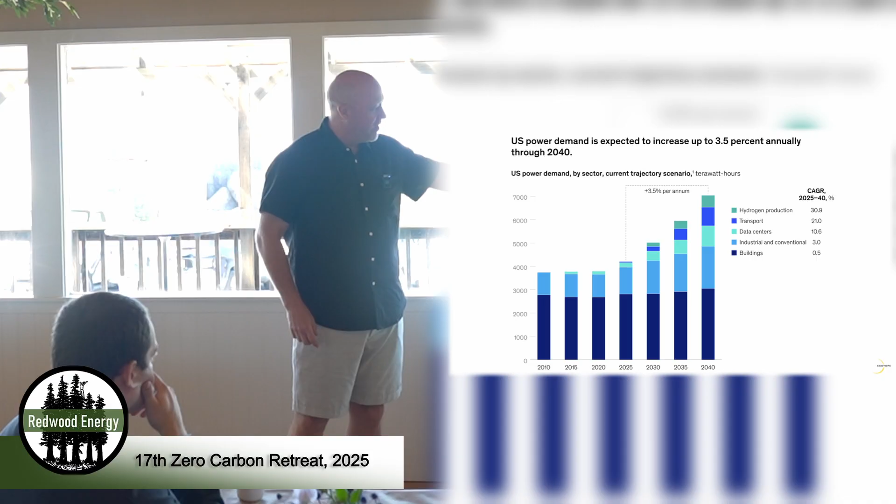So carry on, okay, I'm going to go kind of fast. So the energy demand growth—this was a McKinsey report, basically showing steady growth from now till 2040. The areas we're seeing growth in are hydrogen production, transport, data centers, industrial, and conventional. That's all big picture data projection, but there's essentially a lot of growth happening now, about 3.5% per year from now till 2040.

The same thing is happening next—oh sorry, I think that's just electrification. Okay, so a lot of the electrification for industrial and buildings, that's sort of the impact there. I don't know a lot about that, I just kind of pulled it up.

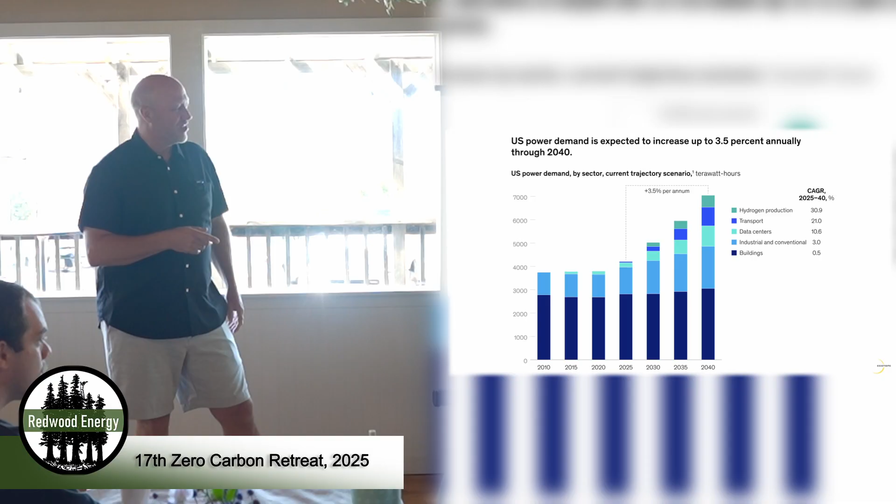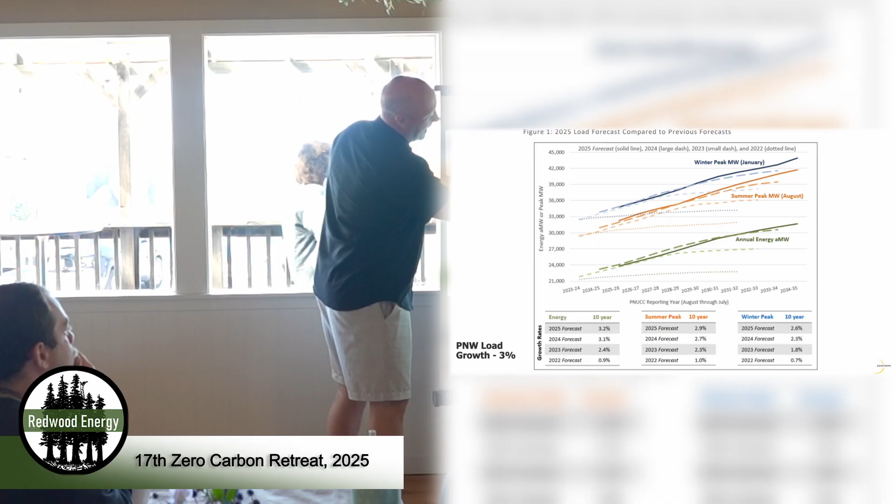But next slide, just reiterating, this is the Pacific Northwest grid—that's Washington, Oregon, Montana, Idaho. We are a winter peaking utility, closely becoming a summer peaking utility. There's our annual average megawatt hour, but the gist is the grid's about 50% occupied, and because of peaking we need another 50% to handle that one day. So that's the real crux of the problem: we've got a grid that's this big, and capacity at this big, but every once in a while we get these spikes. Those spikes are valuable energy.

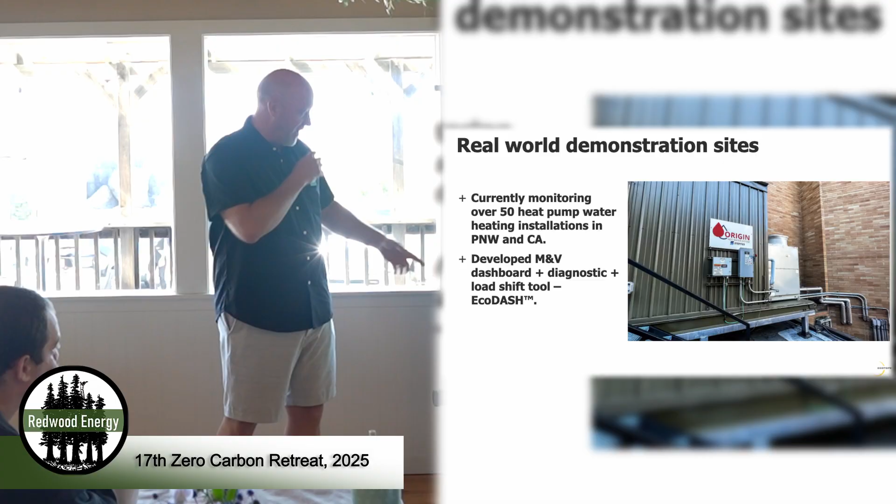I want to show you two projects we've done on this to paint the picture. Right now we've got about 50 heat pump water heating sites that we're monitoring, this is 1 minute data, super valuable stuff. We developed a new tool called EcoDASH - it can do M&V on hot water systems. It's a dashboard, a diagnostic tool, and it can also automate load shift, and we've done a lot of automation on that to try to work around things.

What are the size of the heat pumps in this? In this one, this is a Mitsubishi 10-ton or 11-ton heat pump, I'll show - they're kind of bigger, central units.

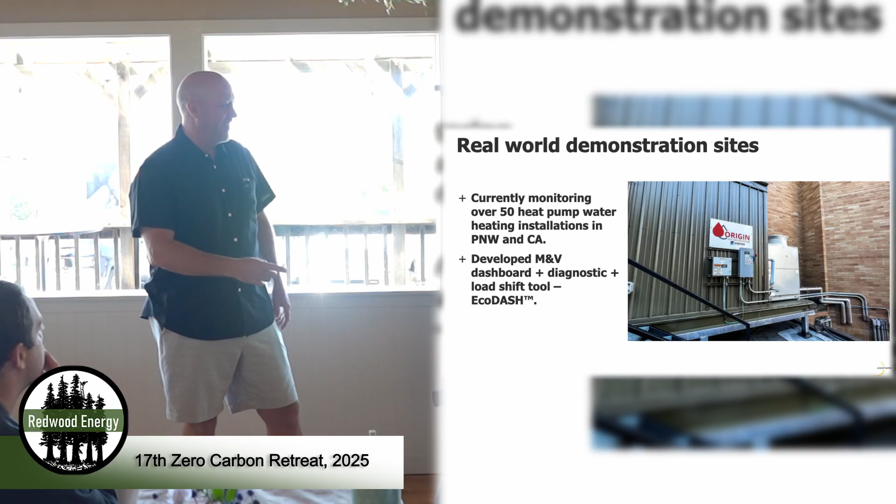Next, so this is a project we did. This is one of the first Mitsubishi heat pump water heaters where it was built in a factory - this idea of trying to scale.

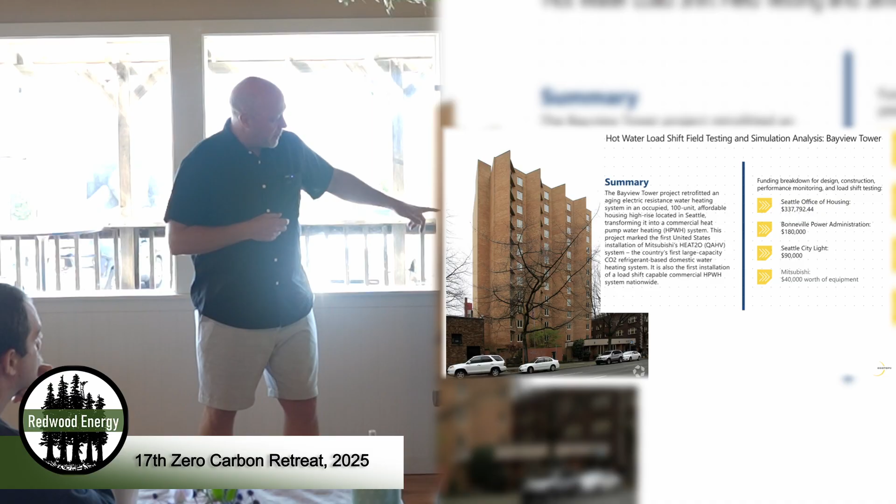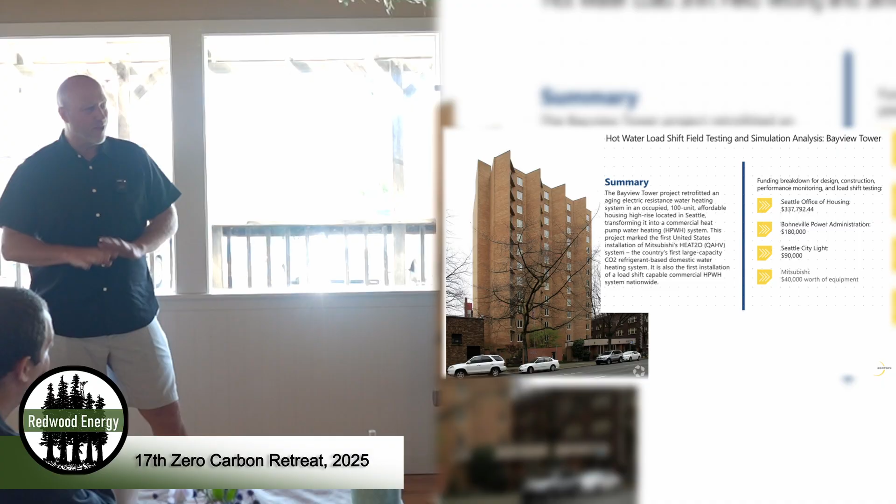This was an existing building, 100 units, heated with electric. Remember, Seattle electricity rates 20 years ago were 3 cents a kilowatt hour, flat. So everything built in the 70s and 80s - it's cheap hydro. Hydro costs half a penny a kilowatt hour, that's all in, so it's super cheap power.

But the problem is it's all used up, so now we're in the growth era. This was a project, we got some funding to do this. Those are kind of the background prices - this is an electric plant.

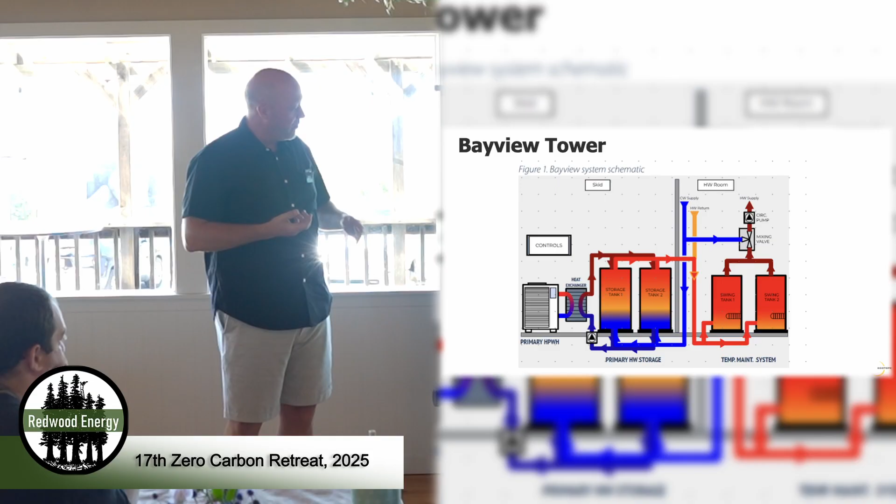We've seen this plenty of times. This was built on a skid in a factory and shipped out. You can kind of see it in play - that's the skid over to the right, and then this is us arriving. It took 4 hours to connect it up, pretty quick. You have to do some revalving inside to kind of get ready for it.

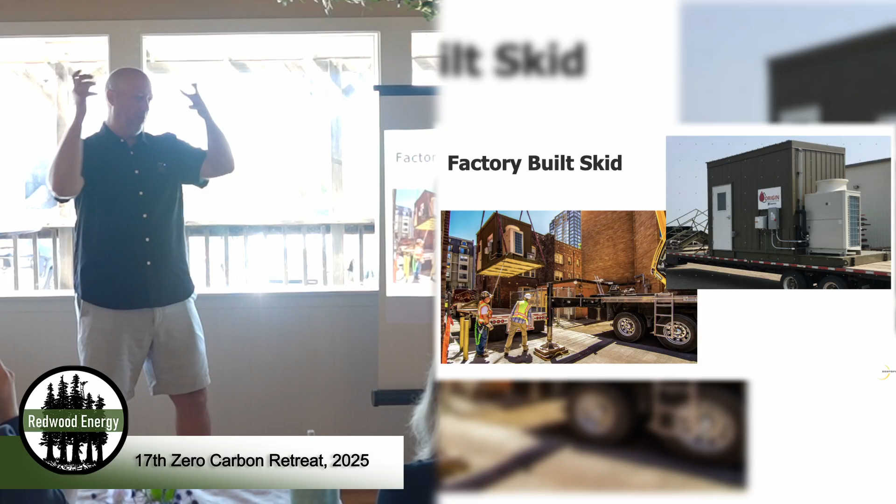So you have some redundancy, and then you plug this thing in and switch it over. We've done that now on about 10 projects, pretty straightforward - there are some steps you have to follow.

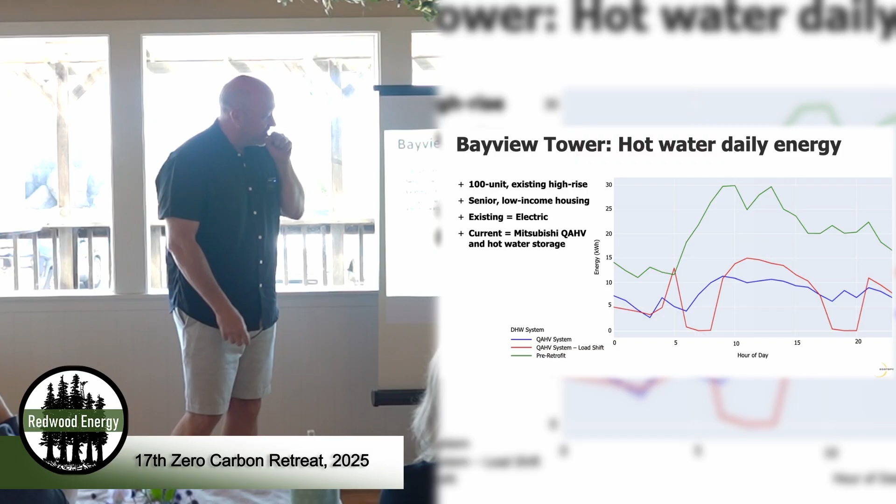Next, here's kind of the results. Green was the existing electric. When we put the heat pump technology in, that was the blue, and the red - this is the power used, energy - and the red shows when we've load shifted. So we can load shift now the morning and the evening. This was sized for load shift, so it shows we can do this now.

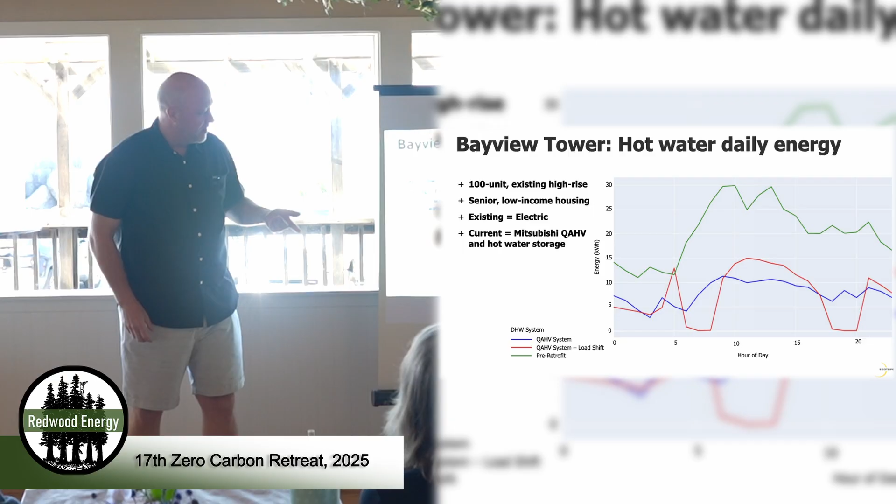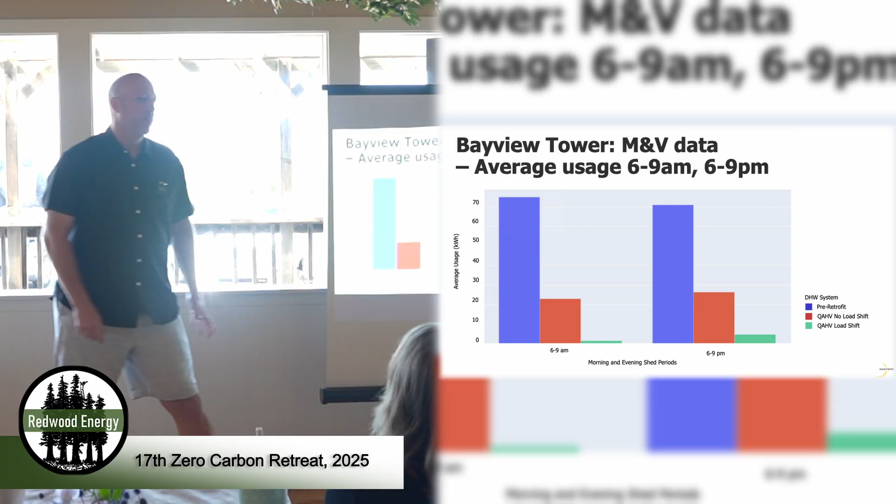Next, here's the savings. The baseline was 70 kilowatt hours from 6 to 9 and 6 to 9 - those are kind of the two peaks. But we can see a massive reduction just with the heat pump technology alone - you're two-thirds there, and then when you shift out a peak, you're there. So there's 70 kilowatt hours in 3 hours that was shifted, and so we can do that.

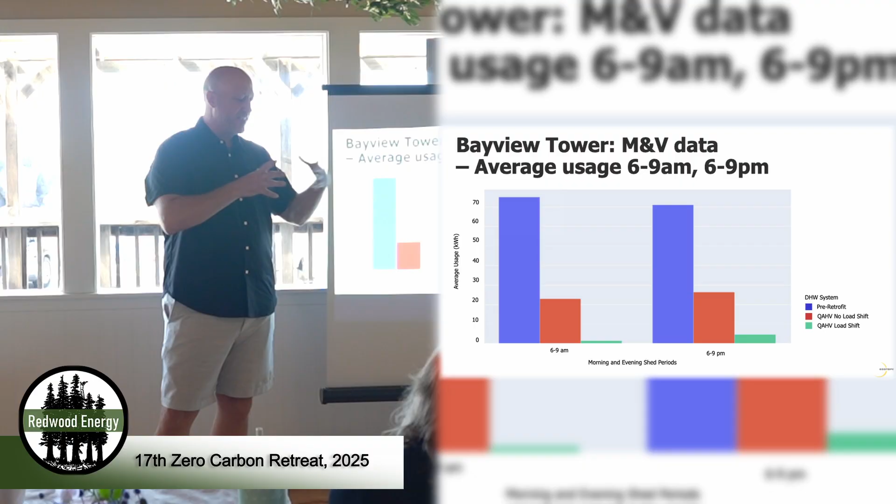Seattle City Light is very happy about this - they've asked us for more, so we're working a little bit bigger, getting 10 buildings and doing all those together, to see what the impact is.

Next, this is another one I did - same project, the research team did this, I didn't personally do it, I helped with design.

This was PG&E territory, and this was 2 buildings. Both were replaced with Mitsubishi QAHVs - so they were gas replaced with Mitsubishis. They're about the same number of units, 120, 130, so a good case. One of the buildings has a much higher recirc load than the other.

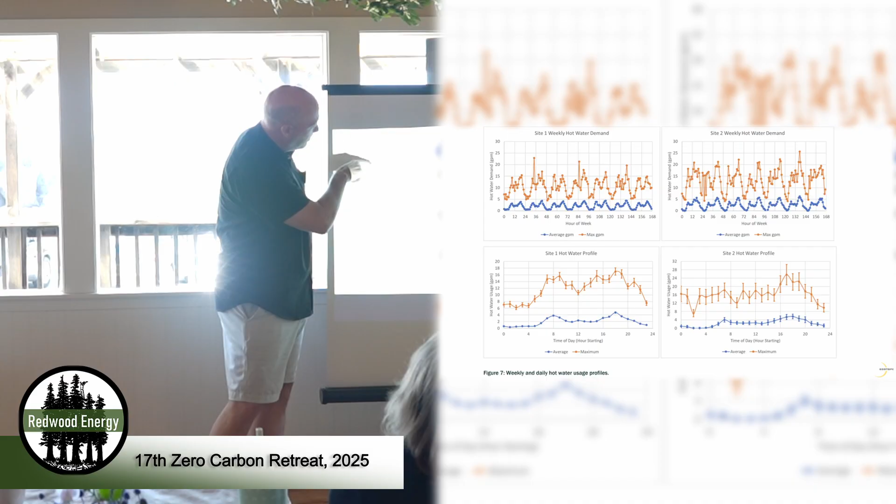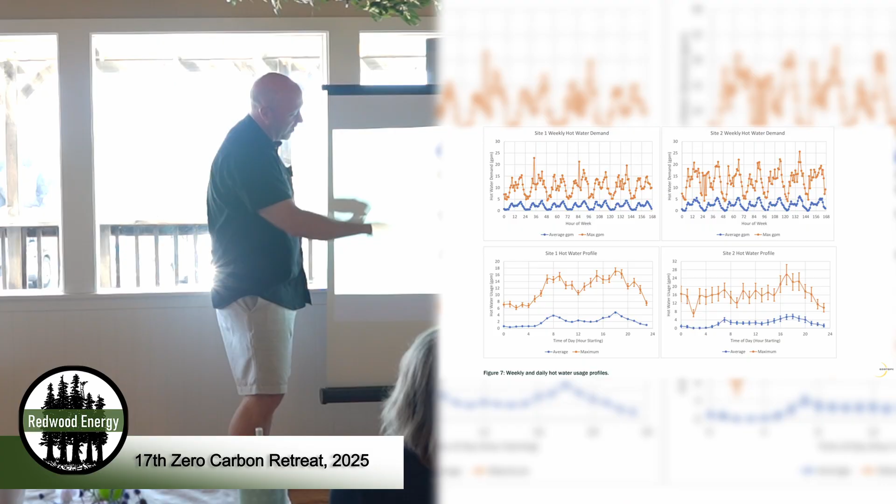This just shows the data. This is pretty interesting. This shows our standard 16 GPM for 140 units, that's our peak. So this validates some of Appendix M's findings, and then you get an occasional 0.1. We found it's about 0.15 to 0.2 GPM per occupant at peak. Appendix M will arrive at about half, or about double what you actually see. So you're safe using Appendix M, the water WDC calculator, if you're familiar with sizing.

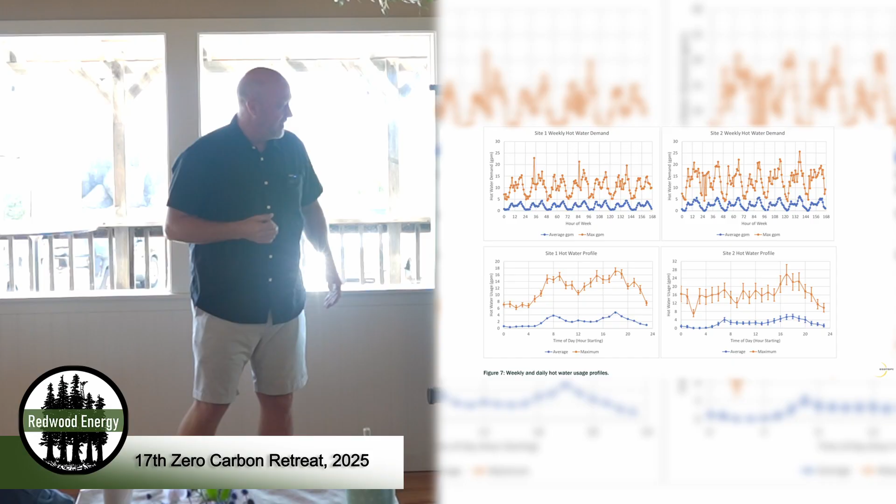Let's go next. So this is just more data. This was an experiment. We did 7 different load shift schedules, so we tried a bunch of different stuff. What we were chasing was energy reduction, greenhouse gas emissions, and total system benefit.

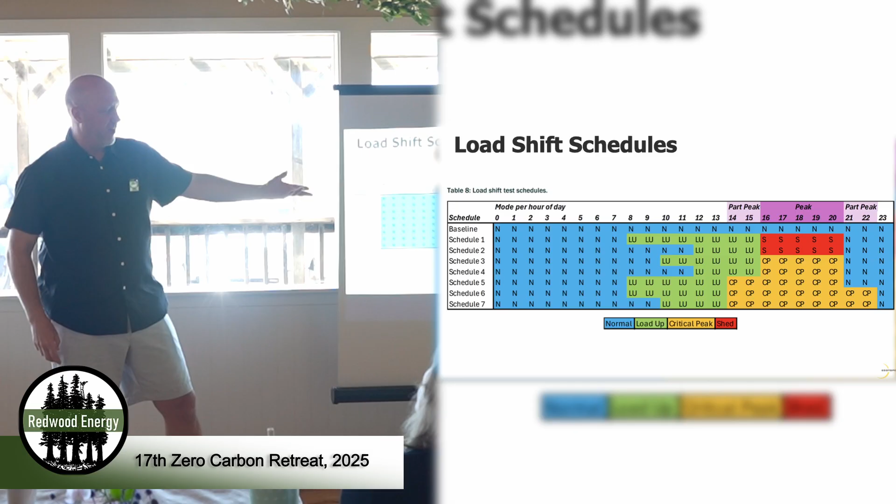So we ran through all these different scenarios using our EcoDash programming. Here's normal operation, here's a load up, here's another scenario, I can't remember what these are. This is where we cut the swing tank off. So we tried a bunch of different scenarios. There's a CalNEXT report, that's who funded this, and you can read all the details if you Google it. I'm happy to send it to you if you send me an email.

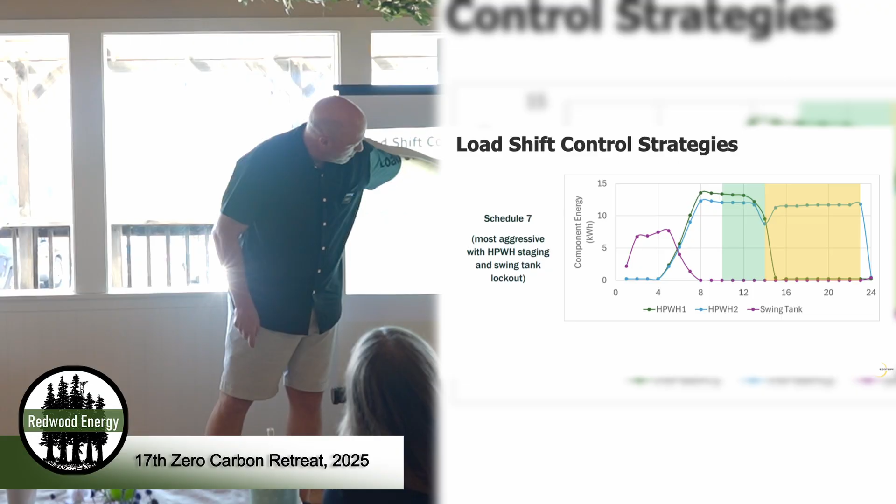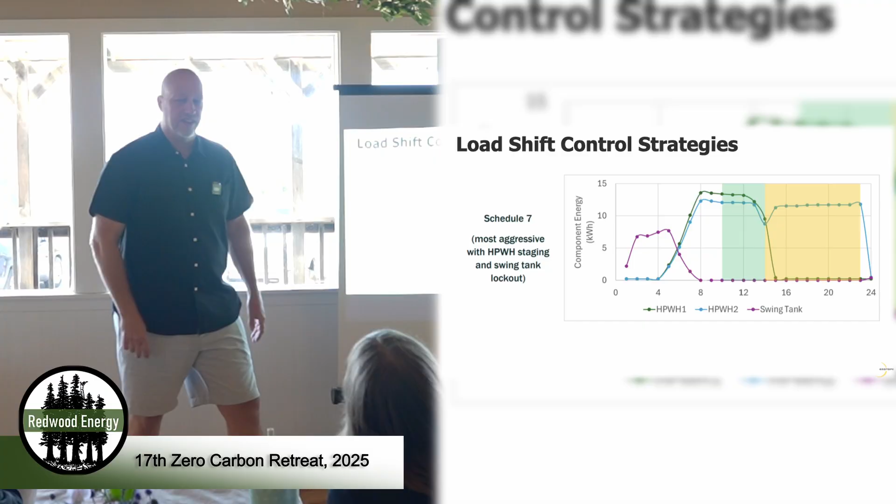But anyway, next slide. So this is an example of Schedule 7. We show heat pump water heater 1 and 2, a ramp up, a load up, and a shed. That just shows an example of what's happening. So this is a way to shift out of that peak, and if everyone does it, the theory is we'll see more capacity freed up. That's what we're chasing with this particular technology.

But the takeaway was we couldn't find one control strategy that would deliver all of the benefits. You could do one and get good energy cost reduction, but it comes at a cost of something else. So we can't really arrive at this ideal state where you get everything. We can't do it right now, or maybe somebody else will figure this out. But this was what we found.

So that's the takeaway, you can't get all of them right now with how we tried it. Greg, would you confirm or deny with our load shift work what he's saying? He's saying you can't simultaneously hit all of it. Yeah, I mean, it depends, devil's in the details. What's your local grid look like, what are your occupants' preferences? There's lots of simultaneously not always overlapping things you're trying to balance. Yeah, same experience.

I have a lot to get through. Just quickly, I'd say working on these two projects, they have some of the worst distribution systems you'll ever see in multifamily buildings. So if you can do it here, you should be able to do it everywhere. And you can turn off your swing tank at peak, there's enough draw out of the main so you can just turn that off, and that can be super helpful. So we did that here. But that was the finding.

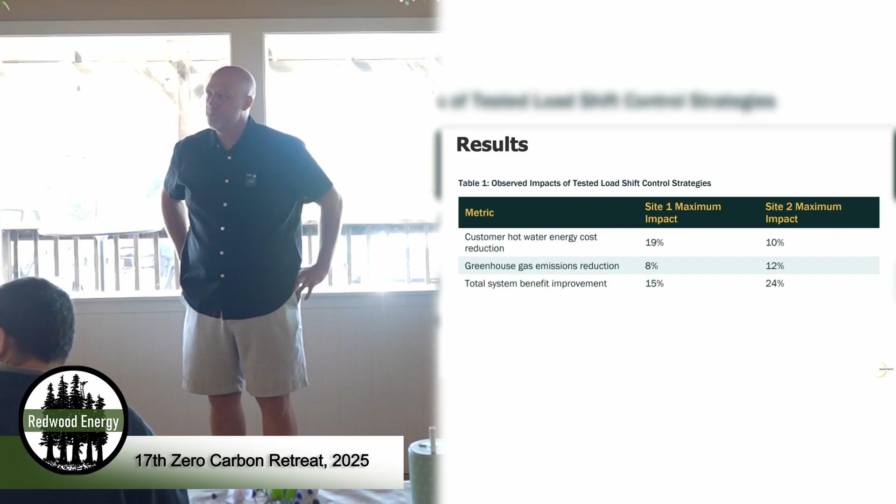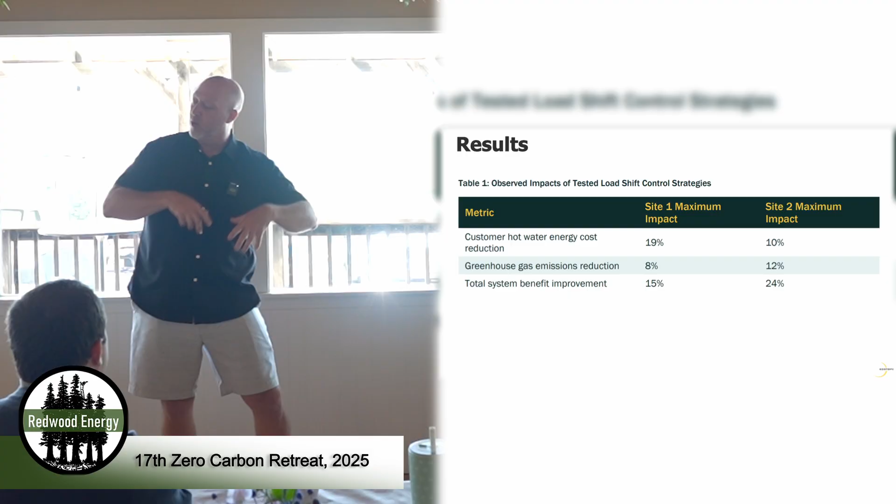Got it, thanks. So if it was just load shift, then how did you see energy savings, energy reduction in the first line? So you're focused really on there's no swing tank operation, one heat pump not two, and you're just pulsing along, right? And then we do another one where we load up earlier with two heat pumps, and then coast through. So it's testing the sensitivity of that. But if it is the regular operation with two heat pumps and preheating, then you wouldn't expect any energy savings, right? It's just shifting the load to different hours.

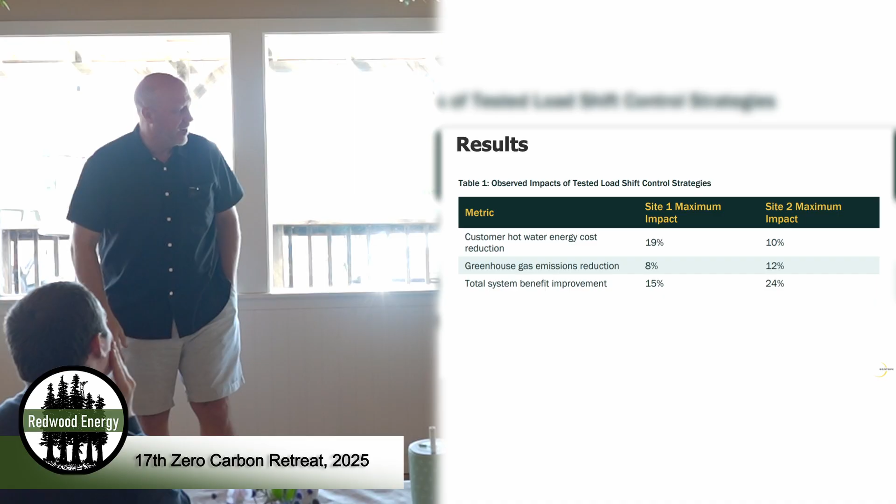Yeah, I mean there's different scenarios in there. It's hard to summarize, but the report does a pretty good job showing the results. I'd encourage you to read that. But that's kind of the simple takeaway. Next.

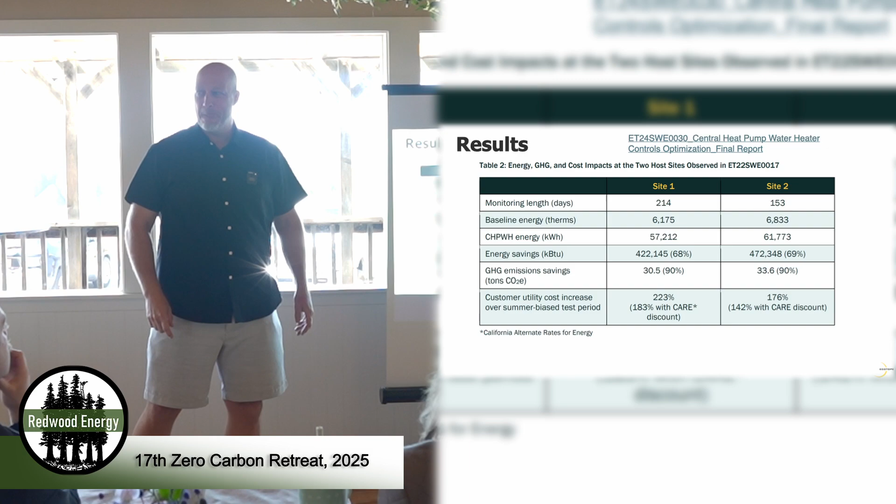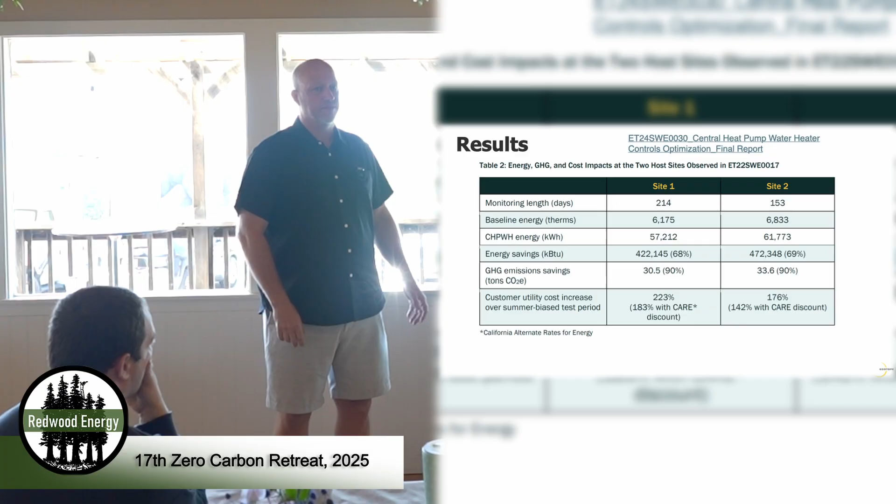Gas compared to this high efficiency 2.7 COP with load shift, we stay out of the peaks, and we're still 2x. It's because of the demand charges. So we need demand charge reform. That's really what it comes down to.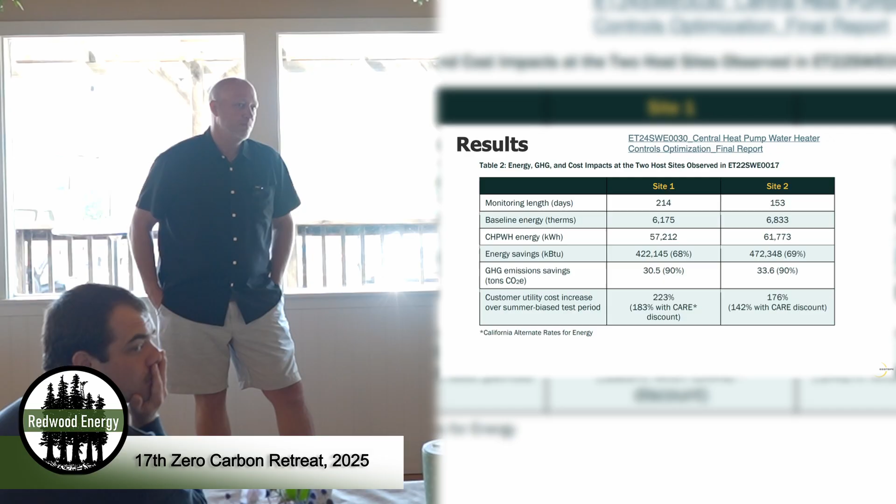You can punt on this question for time. I want to understand how you did these comparisons, because even with a large system, comparing apples to apples when demand patterns change, and even the grid changes, comparing counterfactuals for what the grid looks like today versus two weeks ago. Totally, there's lots of things that are really dynamic, so I wanted to understand that. That's a great point. I think this one was just pretty straight PG&E grid and rates.

What fraction of the energy use in a typical water heater system is swing tank, roughly? Because if they have really bad distribution issues, I'm wondering if it's an overwhelming amount of electric resistance that's really dragging us down, or if this is more representative.

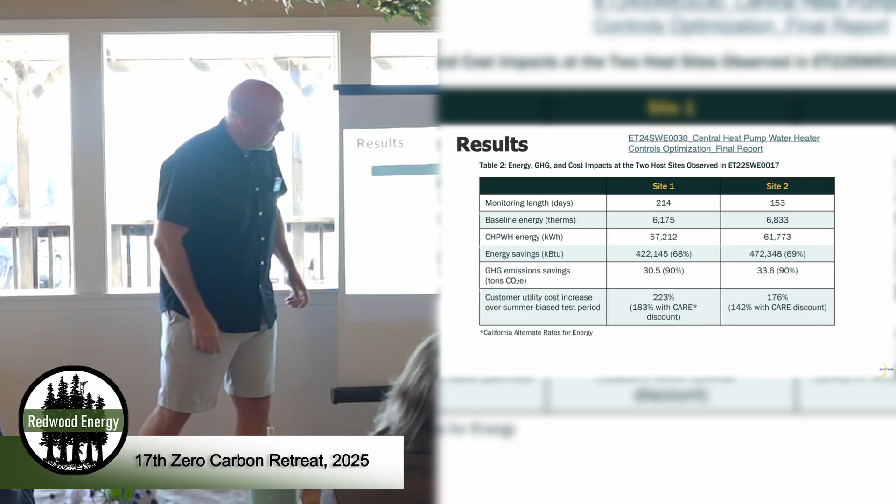That's a really good question. I didn't do this research, I'm kind of just reporting on it. Scott would be the person to ask, but this was the bigger research load. For whatever reason, I think it really came down to one of the swing tanks being a lot higher wattage than the other one, and just by nature of that, that happens.

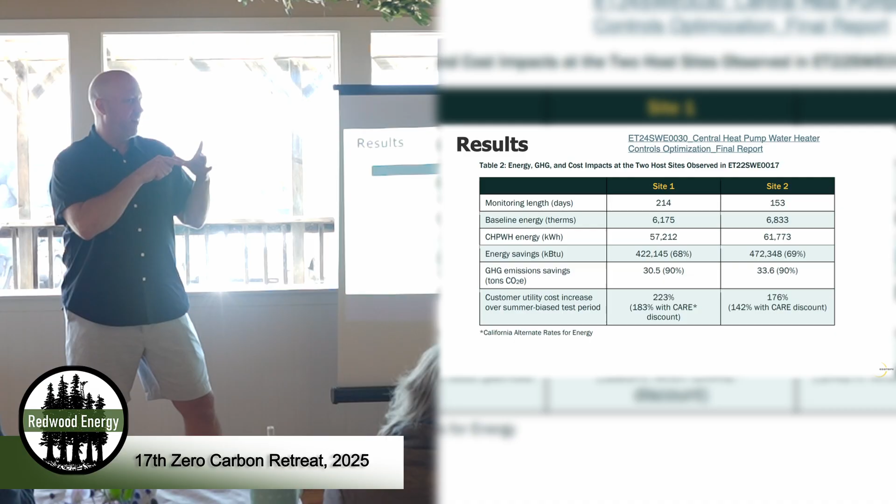Just as an aside, we've been optimizing swing tank, and we've got a job in Portland where we had 15% of the energy with swing tank just by optimizing the control of that swing tank, i.e. we use an electric boiler, forget the elements, because you can't control them, they're black box. But just by optimizing that, we took it from 15% of the load to 2.

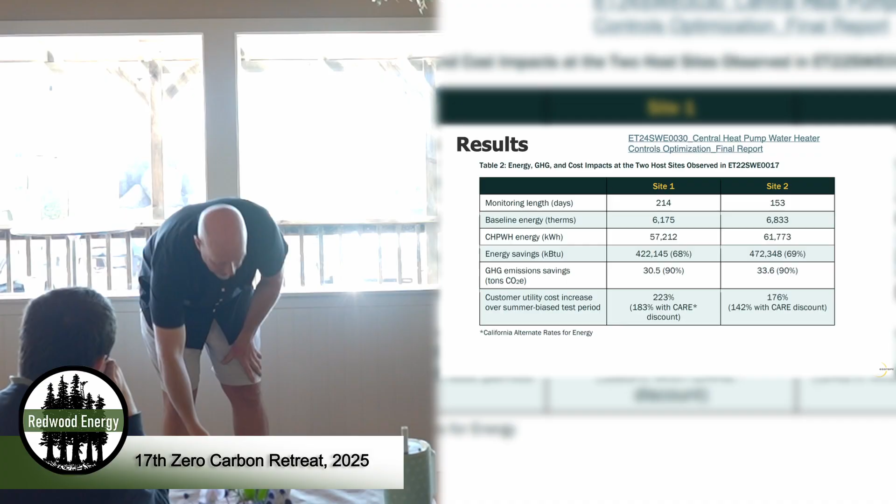What you do is say, whoa, back off. Because there's a sensor at the bottom of the tank that starts the resistance going as soon as it's 2 degrees up, like, let's go, hurry, we gotta get it. If you can get control of that, which you can't with a tank type, but if you can, you can push it off by saying, whoa, let's hold off, then put it on. So a lot of focus there, but optimizing the control of that backup is super important.

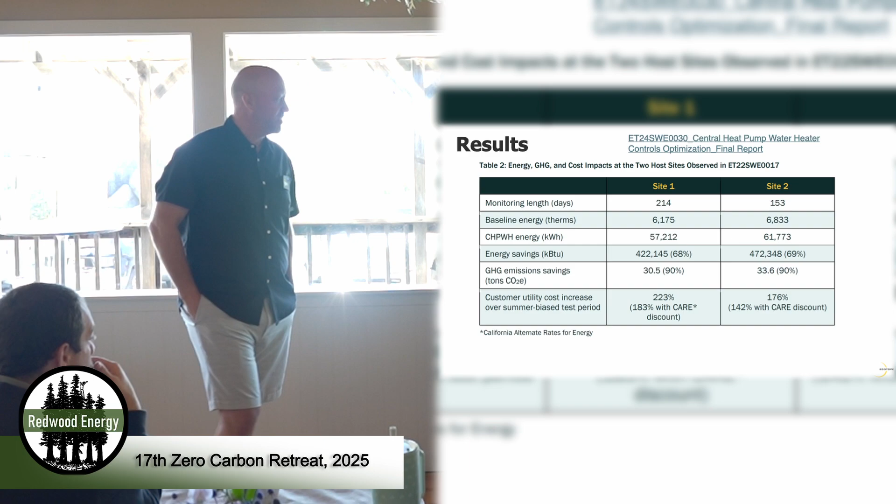Next. Sorry, go ahead, Tanya. I just wondered whether you've integrated this, and I know we've been talking to Ecotope about this with HVAC controls. Part of the issue is we need demand charges because there are capacity issues at feeders, capacity issues in the distribution grid, and the wholesale market as well.

And if you just make that time-based demand charges, well, now you're just going to shift the peak to elsewhere. So great, you shifted load earlier in the morning, but now we see everybody's EVs or water heaters starting earlier, so you just shift it rather than actually mitigate. Right, so demand charges are supposed to send a signal. I think you're right, they're not necessarily sending the right signal.

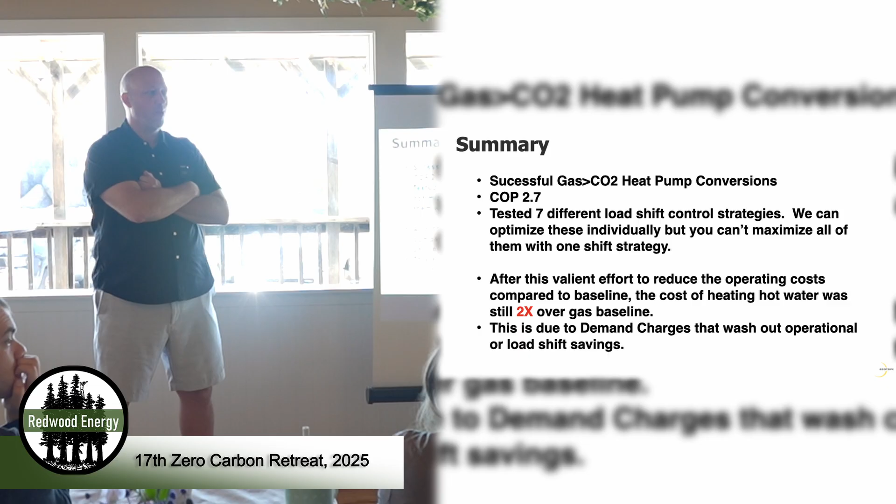But as somebody who's been on the prices-to-devices train for many years, the problem is technologies aren't able to respond. You could fix that with real-time pricing programs like PG&E and SCE are experimenting with, by just having one price. Yeah, all of it's in there: energy, distribution, flat charges, etc. And you can change it every day, it's a 24-hour ahead hourly price. The problem is, can your controls respond to that signal?

Right, and that's the thing that worries me a little bit when we're like, let's get rid of demand charges. I'm like, well, that defeats the point. But then trying to make it time dependent, we'll just do what happened with TOU—now you've got to shift the TOU to a different hour because you just keep pushing the problem to different times of day, as opposed to communicating what the supply-demand imbalance is through a price that incorporates all of it.

It would actually be easy for a machine to understand, but would be very difficult for a human operator. Yeah, that's a really good point.

Yeah, I mean, this is just kind of the surface. Oh, I'm sorry, good, I didn't mean to interrupt.

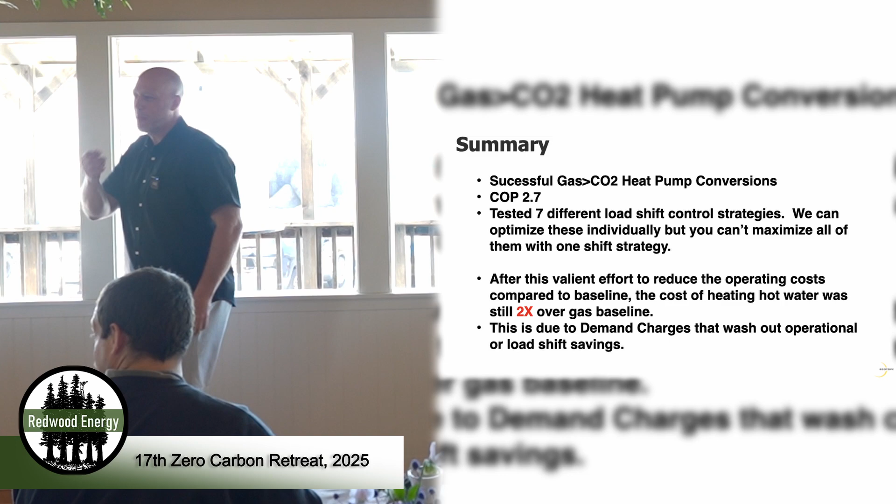Well, the question I have a lot of times when people look at the cost of gas versus electric is that we also hear that over time there's an expectation the price of gas is going to cross over because of the reduced number of users. Does anybody ever look at the life cycle cost, or cost for the next 20 years, as opposed to the cost today in terms of the billing impact?

That's a really good question. I know I've seen some models NREL's been developing, and I've seen a lot of projections about the future burden and cost of gas, but it hasn't really showed up yet. I don't know a lot about that, but it seems like that should be part of the narrative. Today it's more, but over time we expect at some point it'll cross over and actually be cheaper.

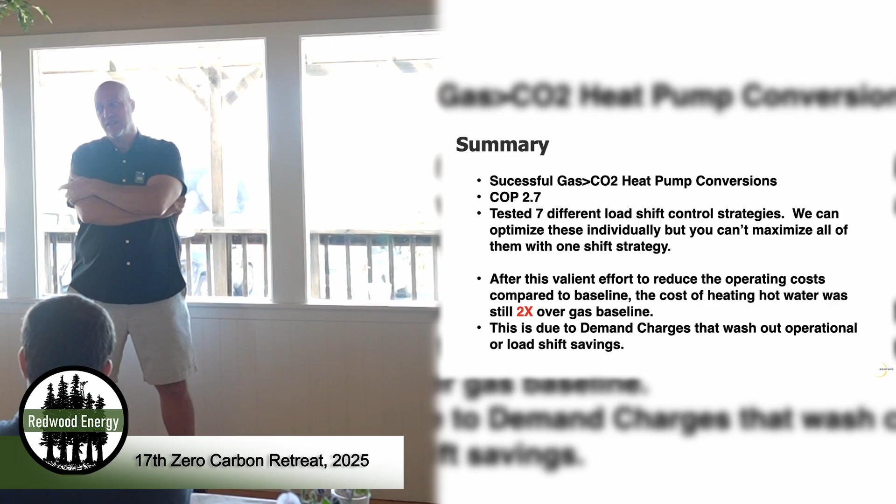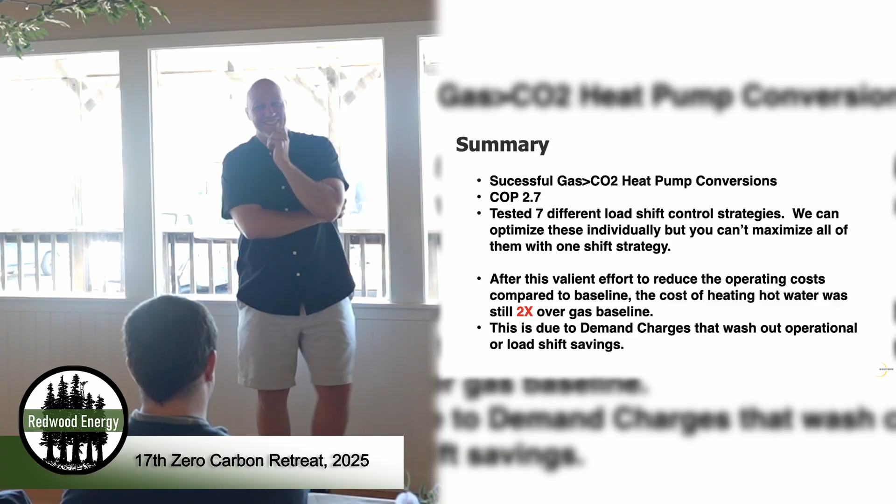Wouldn't it happen with exporters, LNG, that even if demand is going down in the U.S., they'll increase the exports, so gas will go up? Let's keep Shawn going, gas is being covered. Before we make this a side conversation, keep going, man. Next.

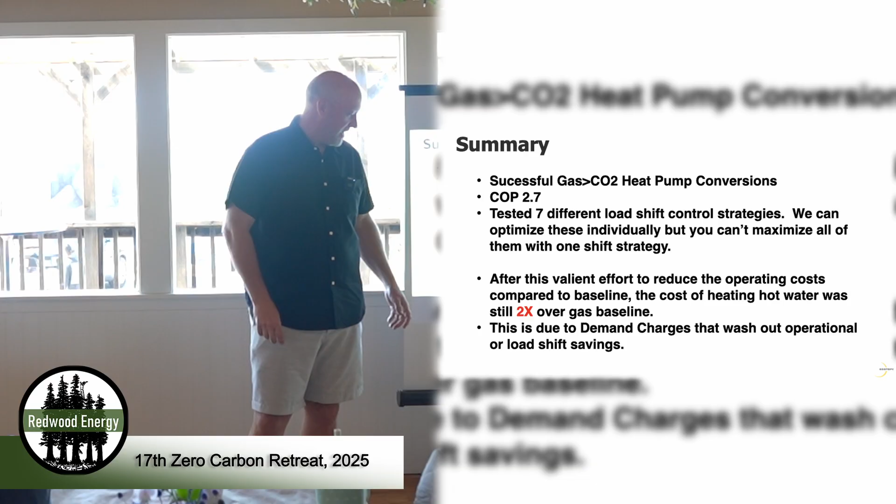Anyway, just making that point, the demand charges are really showing up here, and unfortunately, we've done a good job, but they kind of wash out all your load shift and COP savings.

So next, go ahead. Oh, why is the COP so low? No, that's what we get here. Yeah, you don't get more than that. You get manufacturers' claims of 4.5 and 6.

That's one data point, but the COPs here include recirc, they include the recirc losses. So it's a total system COP, not the heat pump. The heat pump's usually maybe a half a COP more, but you've got to factor that in. That's kind of how NEEA has been establishing performance, as total system COP.

So, go back one. This is an area we've been exploring now for doing space heating. Flexible load buildings are an area we're focused on, the ability to use hot water and space heat energy when you want to. So obviously we use thermal storage to make that happen.

Next, I don't know, has anyone heard of tunneling through the cost barrier? I've been really interested in this, I've done this now on 4 projects. It's pretty amazing what happens, but you push past your standard cost effectiveness limit, and as you keep adding efficiency, this red line keeps going up.

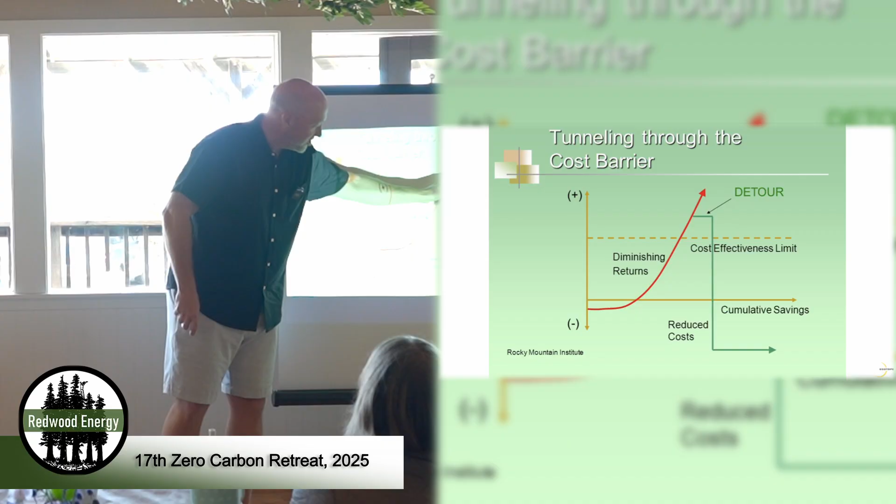You get to a point where you've reduced the load so much that you see the benefit, but you can also mess this up. Amory Lovins says integrated design is how you pull this off, you have to do all the right things to see the magic. The magic is all in the envelope, air tightness, and heat recovery ventilation, and the load is tiny. So you shift the funding from mechanical budget to envelope and load reduction. That's the tunneling magic. I've done that on 4 projects, all different end use, and the same thing happens. So it works. Next.

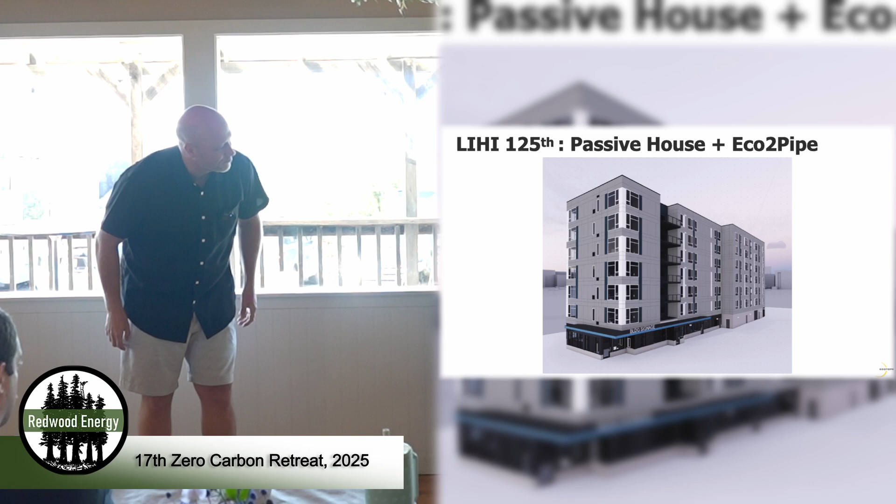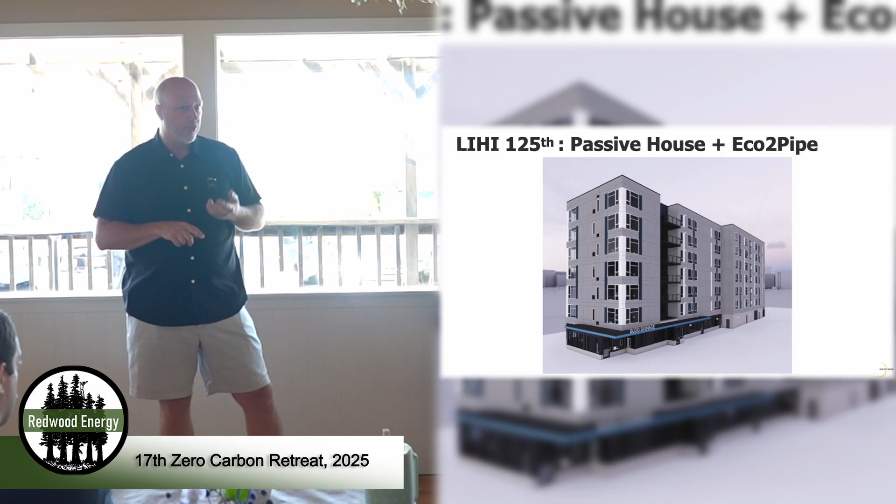This is a project we're doing in Seattle. It's low-income senior housing, 100 units. This project has flexible load hot water and flexible load space heat. The space heat is hydronic based, with 3 air source heat pumps on the roof feeding a big hydronic loop. Next, the hot water is also load shift.

So we've developed a new product called Eco2Pipe. This is a seasonal changeover, load shiftable hot water or space heating system. It's 2 pipes, big storage in the basement, heat pumps on the roof. So instead of having 90 heat pumps to take care of, we have 3, and they're 18 tons each, a lot smaller.

The maintenance costs in senior housing is a big number, especially with heat pumps. Most of the staff don't understand heat pumps, they just throw their hands up. So what they're asking us is they want central systems where we can just work on a couple.

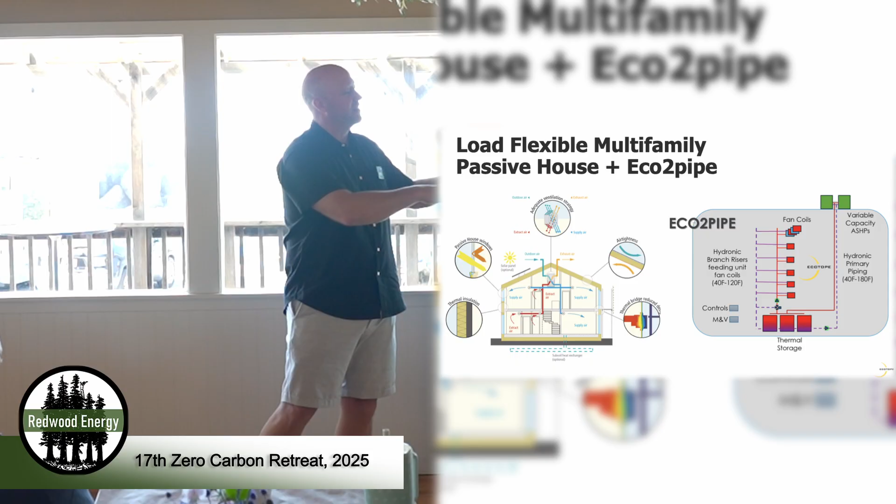We're seeing that the through-wall units break after 3 years and it's wearing them down. The other side is just the passive house. So this is an effort at trying to combine them both, really a response to resiliency. If we have disruption in the future, the idea is you've got this highly efficient envelope so you can coast a few days. You've got thermal storage, and this building also has a diesel genset that can run for 5 days.

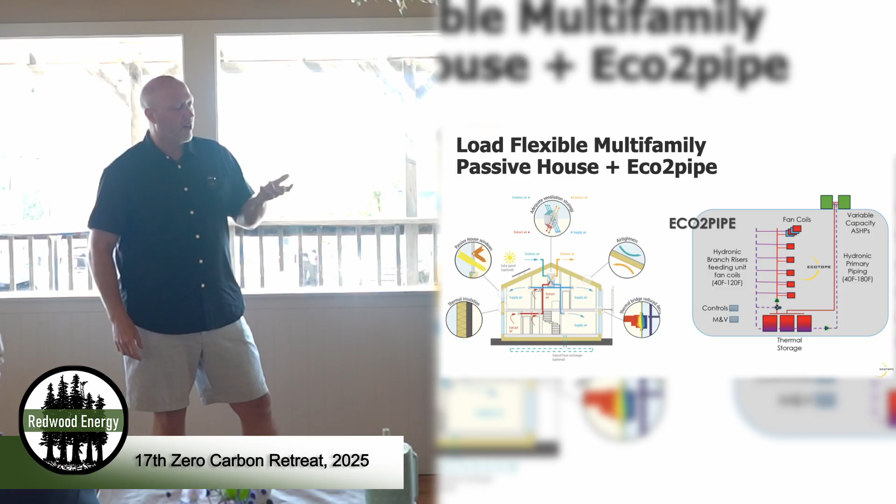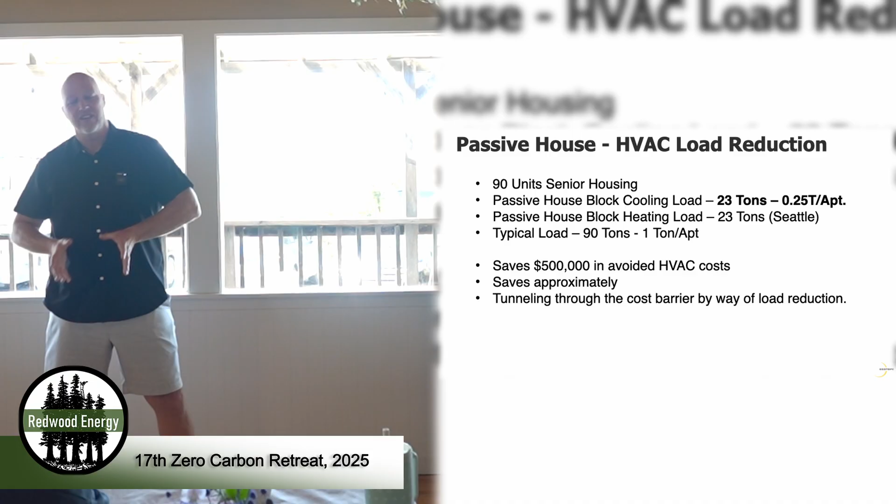So breaking this down, the reveal here is for 90 units we ended up with a 23-ton load. Typical load is like a ton a unit. But if you size an apartment on the block load, not the individual load—the block load being the whole building load—and size your plant to that, you kind of follow the sun around the load. In the morning you're taking care of the east side, in the evening the west side, but you don't need the non-coincident load, just the block load, the peak for the whole building. So you end up buying a lot fewer heat pumps—about $500,000 in saved HVAC costs that goes towards the passive house.

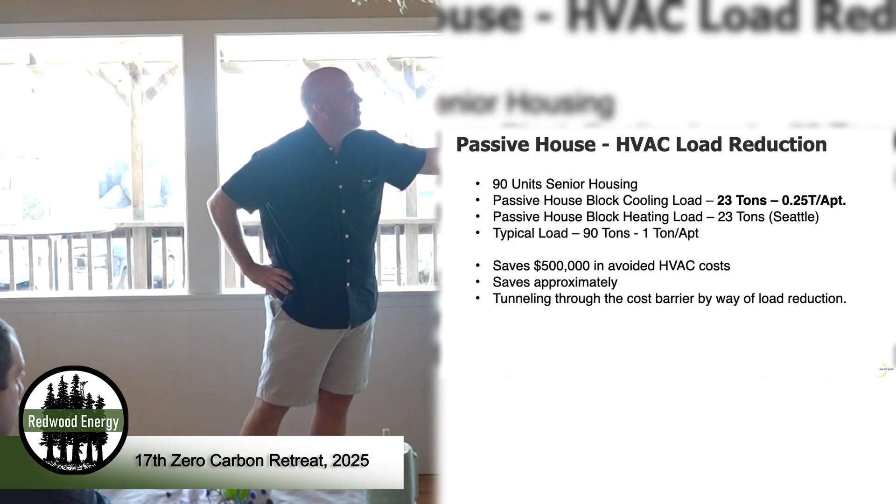This approach is important because the smallest heat pump you can buy for a house is 8,000 BTUs, and you're using less than that even. That's 23 tons total, which works out to about 0.25 tons per apartment.

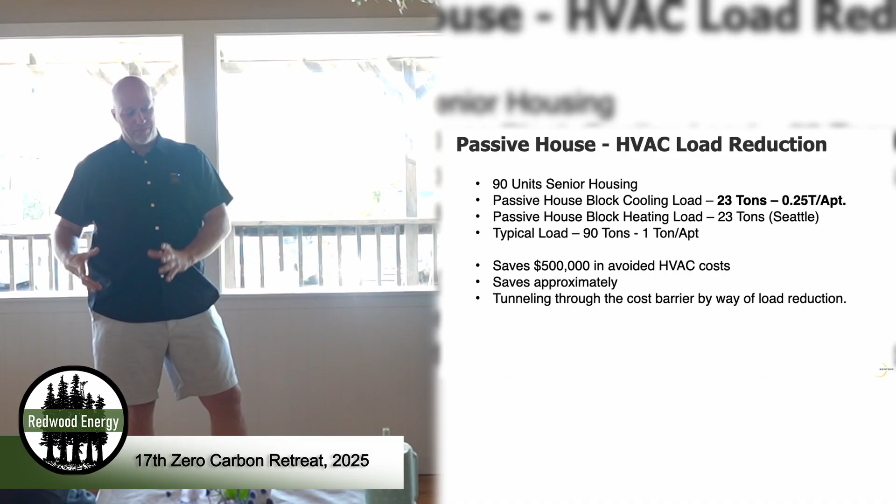So the idea here is you've got one set of equipment and some big storage, and you chase the block load in the building.

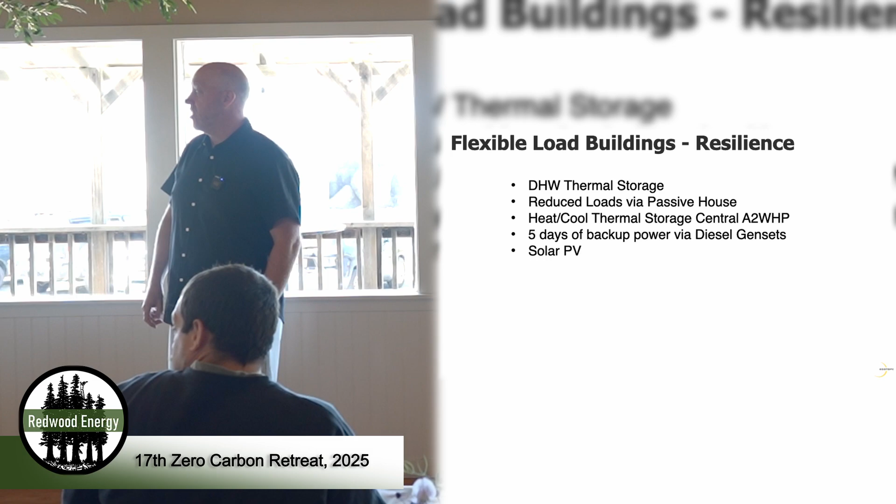Is this heating and cooling both? It is heating and cooling, but it's not heat recovery—it's just two-pipe hydronic. So you have a heating season and a cooling season. That's it, it's kind of standard.

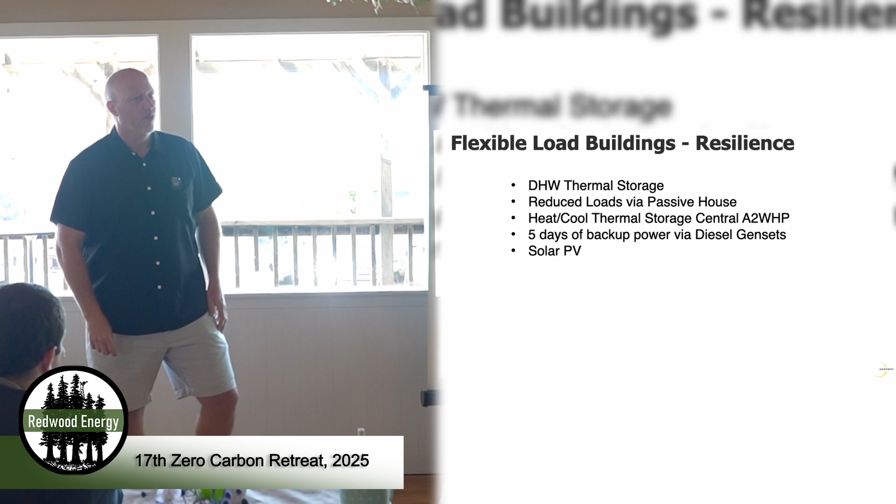It's passive house, so we've said you get a little electric heater or open a window in those swing seasons if we're not ready for cooling. It's pushing this burden a bit onto the owners, saying we'll do our part—you've got two pipes, you get heat or cool—but in the middle, you guys can moderate your temperature with backup.

What do you consider the common use areas for heat or cooling, like what percentage is on for the apartment versus common areas? It's probably about 90% apartment and 10% common area.

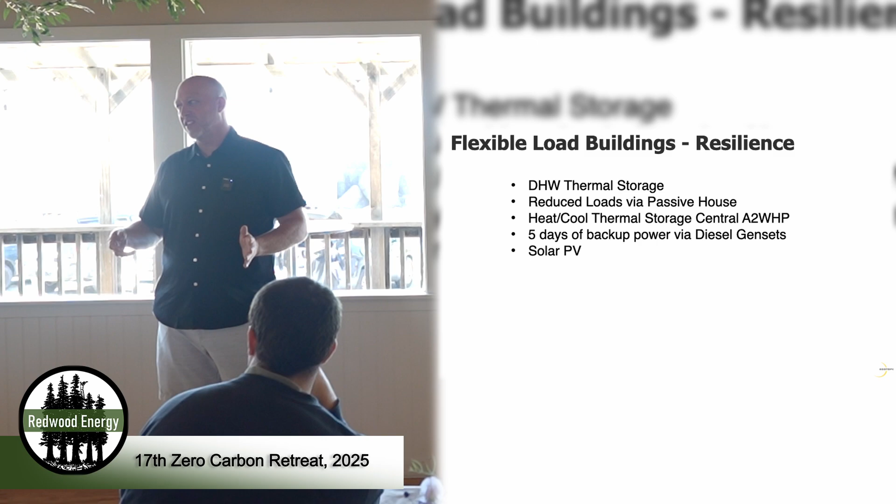The commercial space on the ground floor, which is the common area amenity, is actually just a split heat pump. We didn't put that on the main system because in meeting rooms, sometimes in the winter you need cooling, so we just don't fight it—we added that separately.

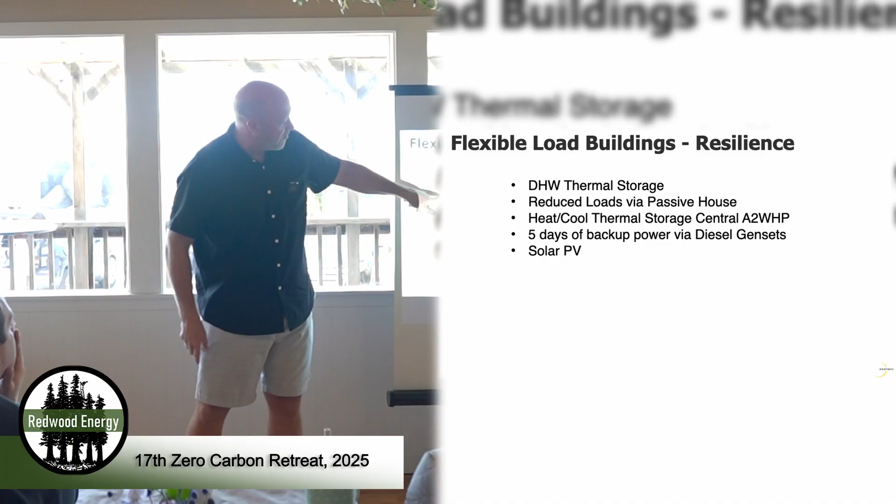The other thing I wanted to mention is it's got 5 days of backup power. This came out of the HUD loan for this project—the owner said we need 5 days of outage coverage, and that's what's showing up today in our HUD loan requirement. So we've got a big diesel genset, an emergency circuit, and there's a second phase going in where we're going to try to put in a battery, then use the diesel for the battery and solar. We'll keep building on that concept, continuing to push on this flexible load building. We're going to start experiments next year once it's built—it's just getting built now.

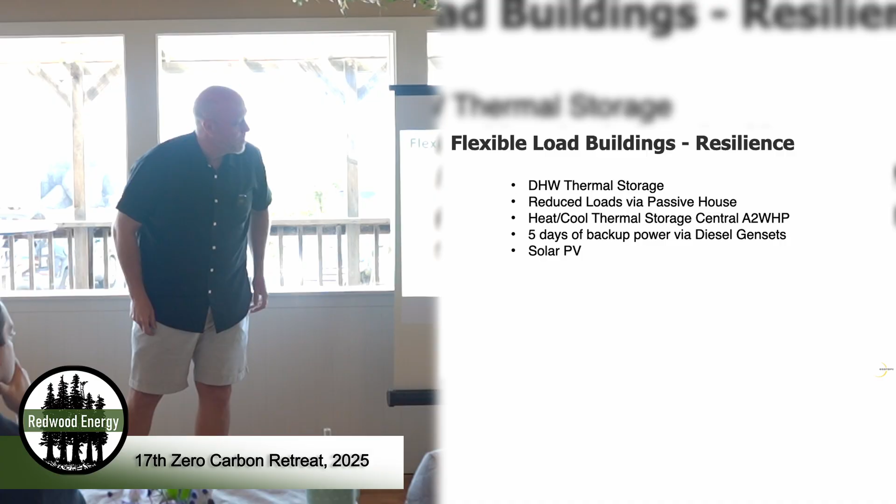This is the last piece—I mentioned the wildfire smoke. We get a lot more requests for filtering wildfire smoke getting into buildings.

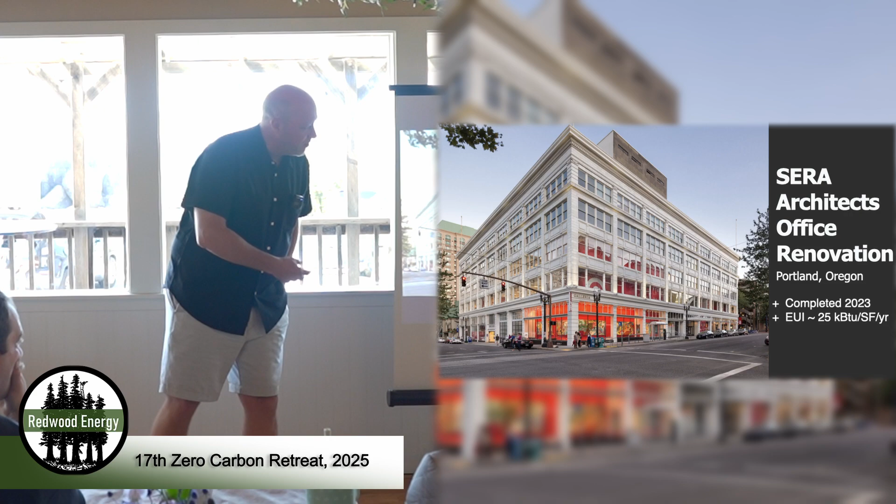So I'll show you a renovation of an office building in downtown Portland. This is an old historic building with single pane windows, built around the turn of the century—I guess 1920.

Turn of the century, last century. And it's got an EUI of 25.

So what we did here, I'll show you some more next. This building was built around a concept we've come up with called design for off. The idea is you run the building in active mode, you run it in passive mode, and you run it in IAQ mode.

So we have sensors, indoor air quality mode. We can look at the outside PM 2.5, which is particulate matter 2.5 or less. That's the stuff that stays in. And we can trigger this system on.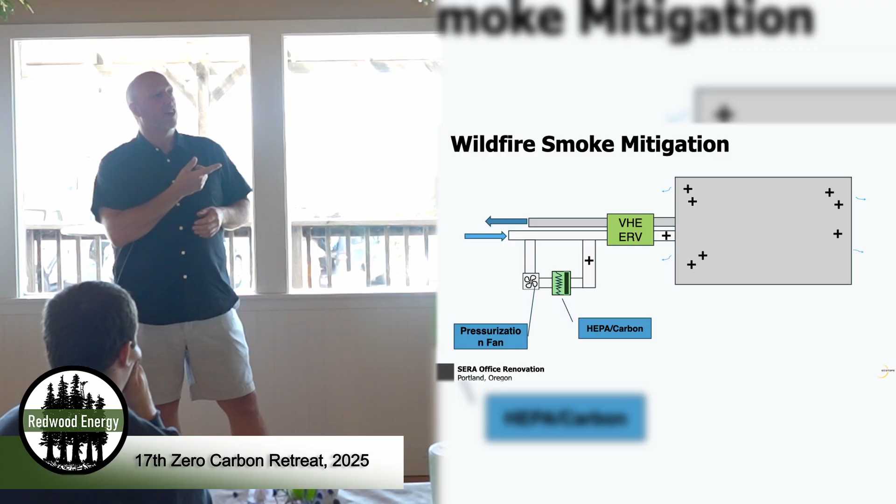So I'll show you how it works, go back real quick. We've got a regular ERV system, energy recovery ventilation system. What we do is on the supply side, we add a supply fan, a HEPA filter, and a carbon filter, and the idea is that we pressurize this space.

So now nothing can infiltrate in, right? That's one source of wildfire smoke. And then you're forcing all of this filtered air in. So you get a double effect: you're pressurizing, pushing anything from coming in, and everything that is going in is getting filtered with HEPA filters, MERV 18, and carbon for the smell.

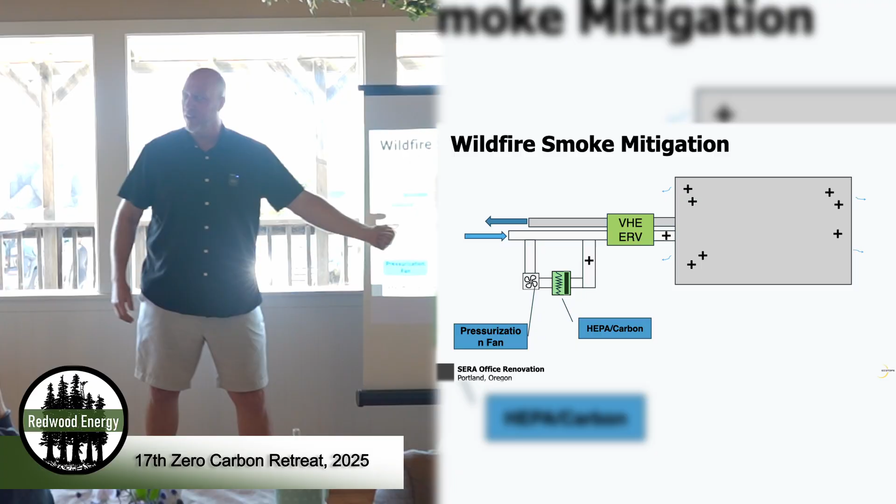But in Portland, they get a lot of wildfire smoke in downtown. Also, the urban core is super polluted. Go next - so this is just showing the design and plan.

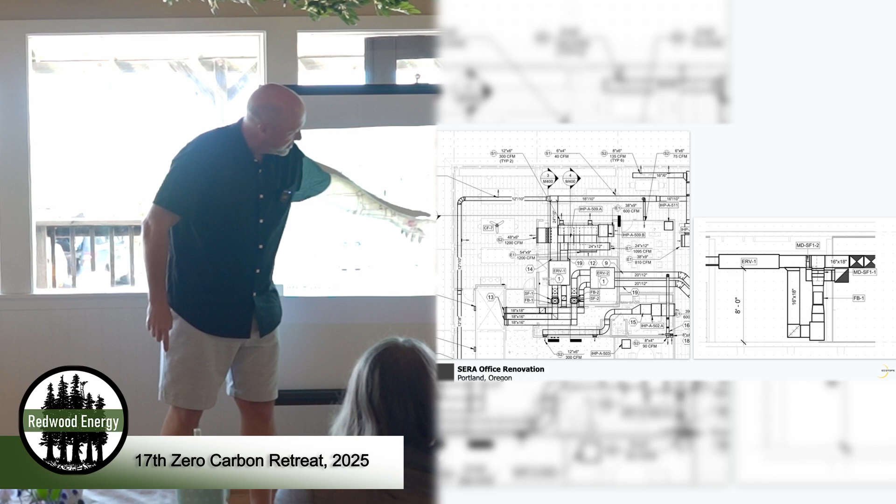This is the ERV. What we ended up doing, over to the right, is a section. So you use the vertical space, go down, over, and back up - it's just a little bypass. Put some dampers in.

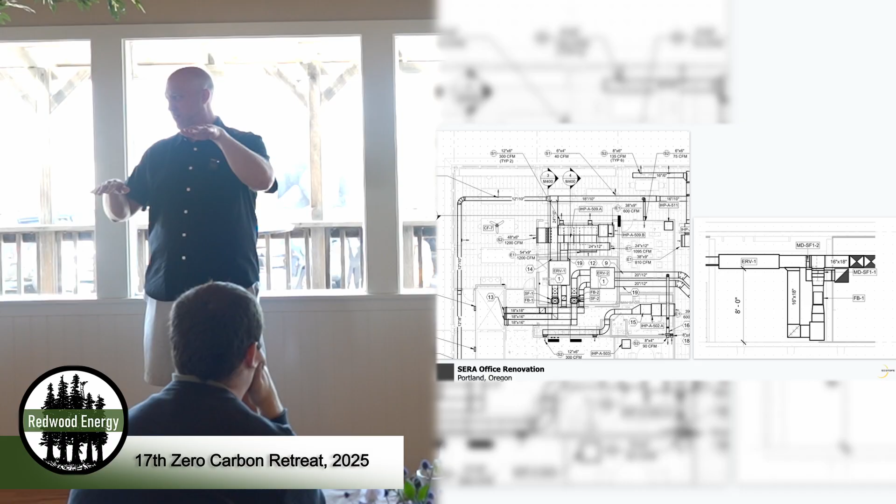We're still using the base exhaust, but we can control both the supply and exhaust. We set the building pressure up about 0.03, so not very much. It's automated - it's sensing PM or something. Yeah, I'll show you this in the graph.

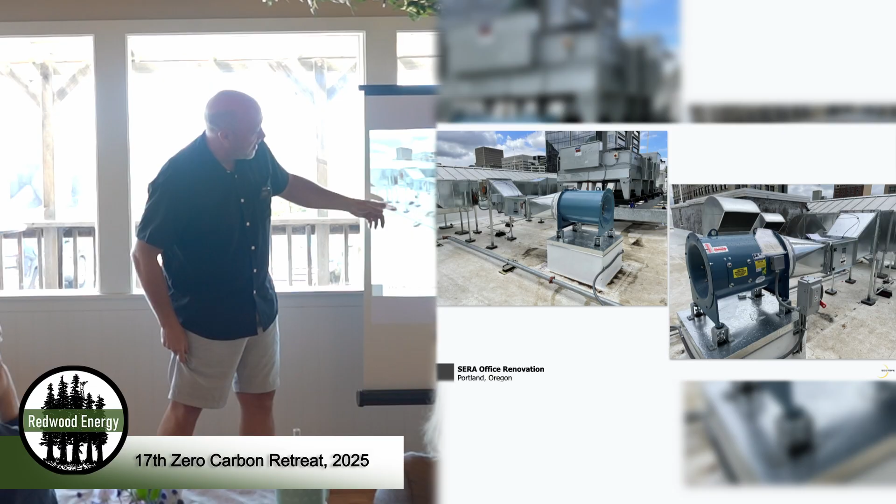This is another one, it's on the roof. We've designed it and they've built it. That's cool, yeah.

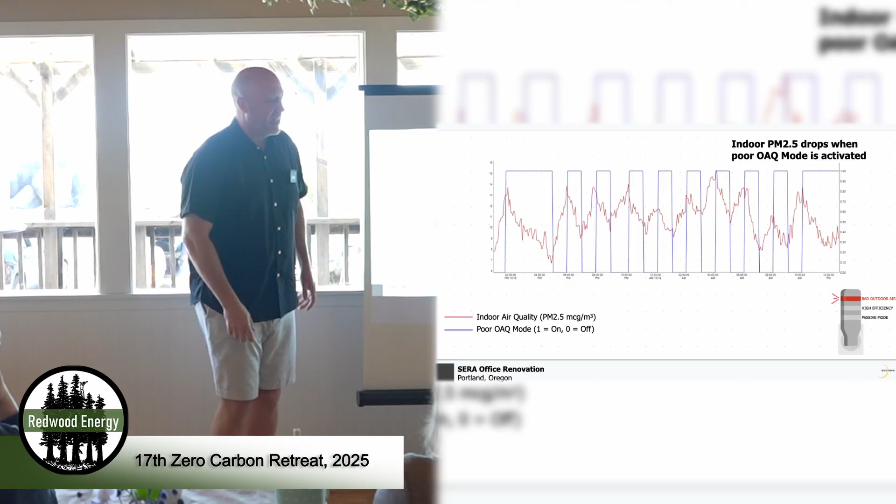So this shows kind of what's happening indoors. This is the blue, the operation of the ERV in one zone, and we can see the PM 2.5 levels. They come up, then the ERV turns on and pushes them down. They come up, we push them down. That's what we do in buildings all day, right? It's a sensor, we push that down.

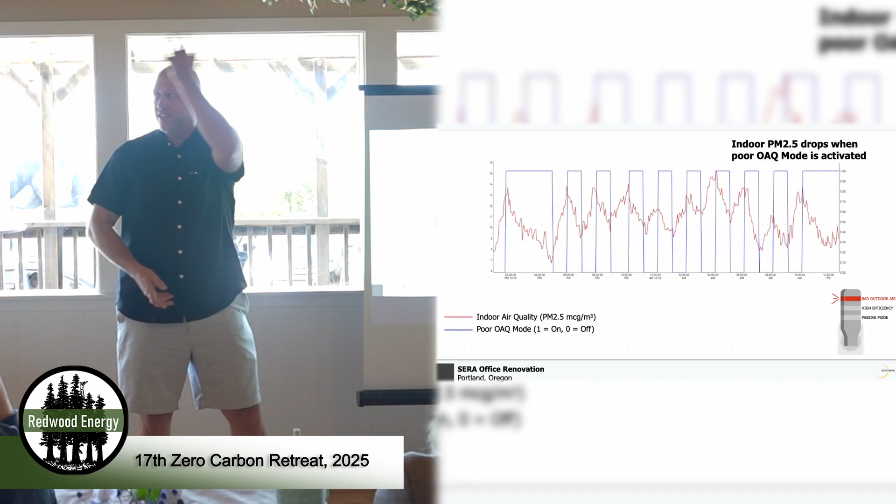You can kind of see, at the bottom, we've got these custom lights that were designed, and they sit in front of all the windows. The occupants know when it turns green, they open the windows. When it's red, you close them. And when it's in OAQ mode, you close them - that turns red or orange, the OAQ mode.

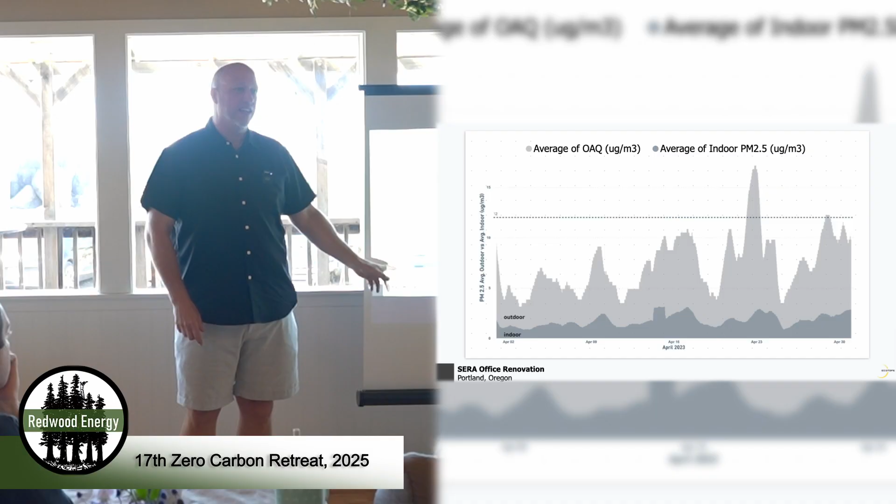Next, and this is the last piece. This is a sample of April in Portland. The outdoor urban PM 2.5 level is showing the light gray, and the darker gray is showing the indoor level, so you can see we've kind of mitigated the impact. The dotted line is the threshold by EPA for PM 2.5 indoors.

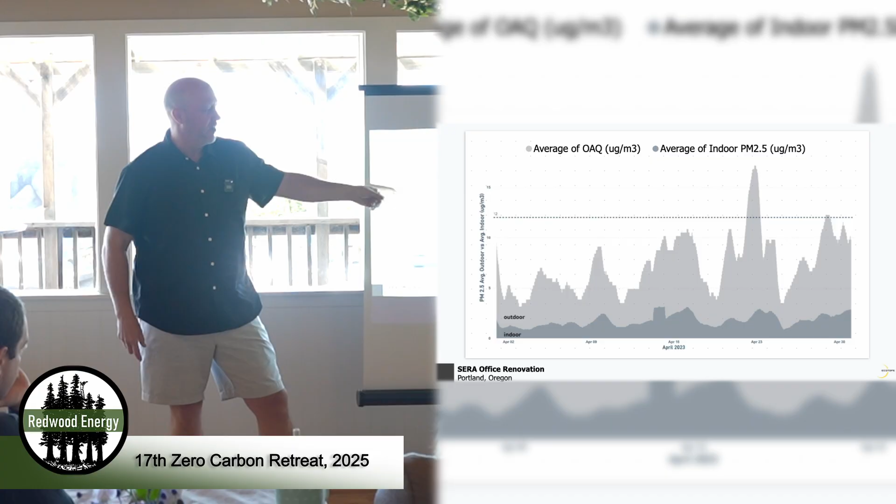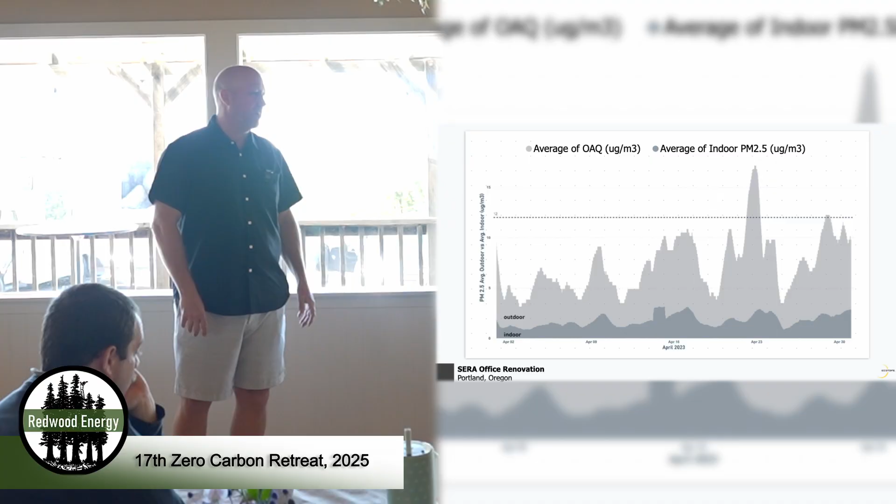And this is a mild month. When the fires came, this line was up here, and we were still down here. I couldn't find that graph, but it happens in August, so it's happening now probably, because we got tons of fire. So you're switching modes - you can't do cooling while you're in this. No, you can, because why are you turning it on and off all the time?

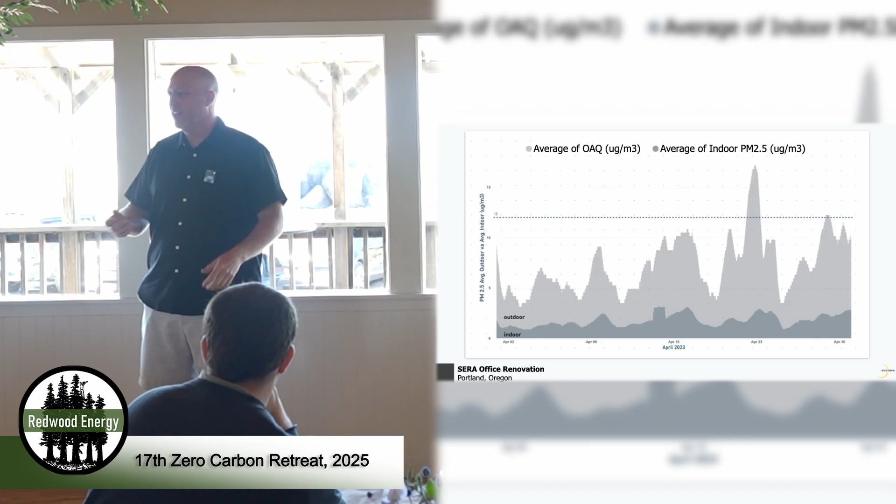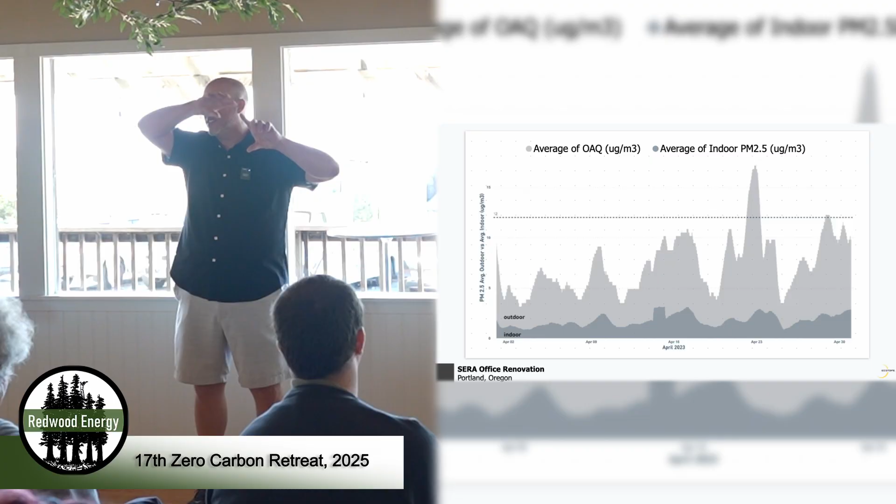In the Northwest, 50% of the year we don't need HVAC, and it happens 2 months in the spring and 2 months on the other side. Same thing as here, but there's nothing more efficient than off, right? That's the idea - when we need heat, we use it, then we turn it off in the swing, and IAQ in the summer. It can be heat or cool, but the idea is that we're pressurizing the space. You can do it simultaneously - we can, yep. And I think that's the end.